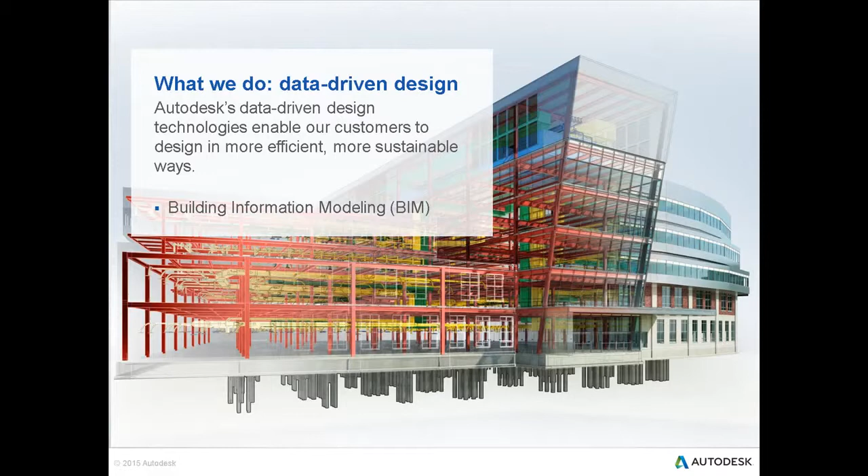When working in BIM, professionals are using visualization to make better informed decisions earlier in the design process, which all leads to one thing: better designs.

Now, there are some key trends in the industry. For example, urbanization. Over 50% of the world's population now live in cities, and this trend will only continue, with a report from McKinsey estimating that by the year 2030, 5 billion people will live in urban areas. In just a few decades, the world will need to support a population of 9 billion.

The emerging economies' development compounds this change. It's no secret that they are growing fivefold faster than most developed economies. They have the benefit of not having to replace existing ailing technology like developed economies either. In essence, this means their growth will continue, and in a not so distant future they'll be technologically level pegged with countries like America, Australia, Canada and the United Kingdom.

At the same time, the availability of natural resources, energy, water, materials and land is diminishing. This is where sustainability and economics intersect and are driving the transformation in our industry. Energy and water in particular are major components in the cost of operations for corporations and municipal governments. So investors, consumers and communities all have an interest in converting to more efficient ways of constructing and managing buildings.

Today's marketplace is intensely competitive. Companies are facing intense levels of competition, higher customer expectations for cost, schedule and quality, and increased scrutiny from investors and the general public.

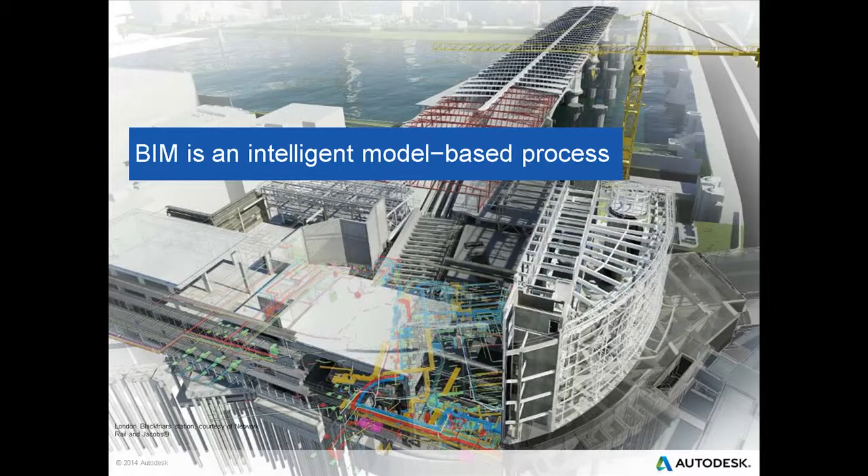Building information modeling is changing how buildings, infrastructure, and utilities are planned, designed, built, and managed.

Now, why choose Autodesk BIM solutions? Well, Autodesk delivers advanced technology for design, visualization, simulation, and coordination. And they also deliver business agility made possible with desktop, cloud, web, and mobile platforms, along with more cost-effective packaging to better meet changing project needs.

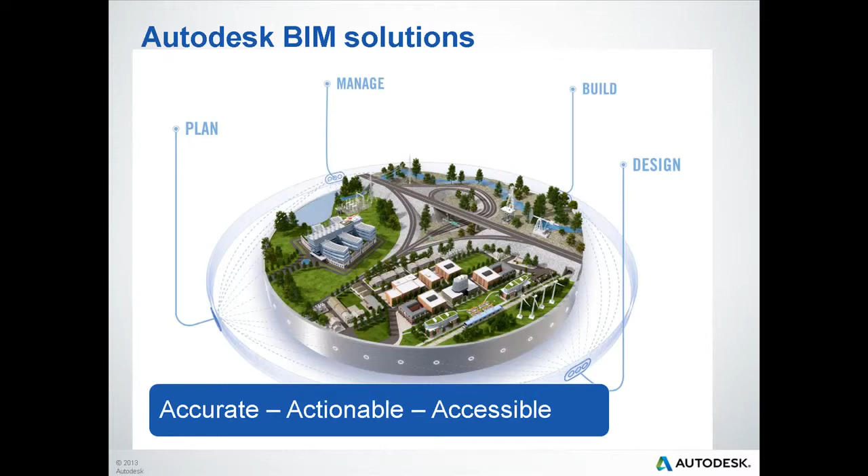Now, what are some of those technology trends?

To expand on the technology trends, a lot of change in the industry is driven by, or at least facilitated by, BIM. This change is disruptive, but it also brings a lot of opportunity to transform business and enter new areas of work. Here are some examples.

Architects and engineers are exploring a lot more design alternatives earlier on in a project by using BIM. Not only does this deliver more exciting and innovative buildings, but it also drives a deeper understanding of detail in the conceptual design phase, when the cost of exploring changes is minimal and the ability to make those changes is at a maximum. BIM is helping the industry move out of the dark ages and become more efficient.

One of the ways this is happening is by multiple personas connecting different phases of design together and blurring the lines between roles. An example is an engineer and architect collaborating together in conceptual design, or an engineer and contractor working together to bring fabrication level of detail much earlier into the project than before.

Simulation is everywhere and is being used by more people than ever before. Autodesk has invested in simulation in the last few years, and what they see is more people starting to adopt all kinds of simulation. For example, Autodesk Robot Structural Analysis or Autodesk Green Building Studio for energy. There's also advanced things like the computational fluid dynamics that Autodesk has delivered. Now, through an integrated BIM approach and linking their Revit models directly, this simulation works seamlessly with your Revit models in BIM.

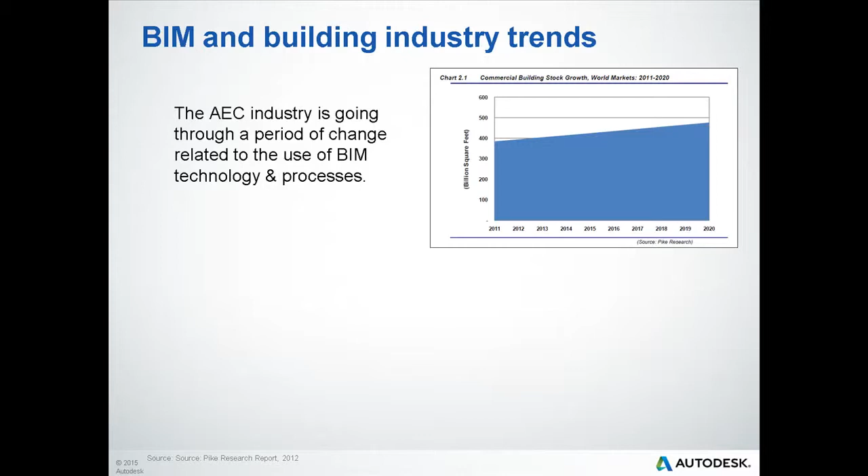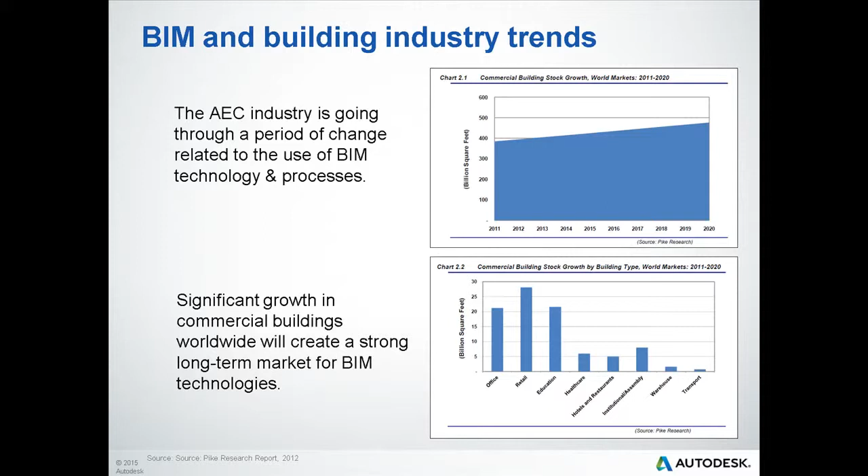Most BIM applications will be performed on new construction activities, although building retrofits provide a sizable market as well. One of the main reasons for performing a retrofit is to reduce energy consumption, and the latest BIM tools support this work through the availability of rapid energy modeling technologies.

Contractors, who now lead the industry in overall BIM adoption, also showed the most dramatic changes in implementation from 2009 onwards.

Now, how is BIM adoption going on worldwide? Well, BIM is not just happening in isolated areas, it's not about the software. What we are seeing here is a global trend towards a different process for managing the lifecycle of all assets in the built environment. BIM adoption varies by country, of course, but the consistent theme is growing awareness.

Levels of BIM adoption in North America surged from 28% in 2007 to 71% in 2012. In the UK, they saw a 39% adoption rate in 2013 as opposed to 13% in 2010.

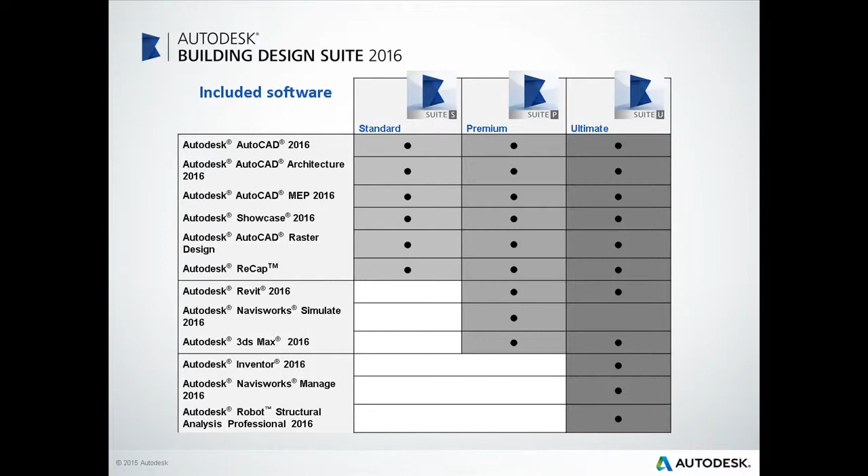The Ultimate Suite builds on the Premium Edition. This is for architects, engineering, and construction professionals who need the power of BIM plus additional advanced tools for design and construction. You'll find in this suite the addition of Autodesk Inventor and an advanced version of Navisworks, which includes clash detection. The suite also includes Robot Structural Analysis Professional, which provides structural engineers with advanced building simulation and analysis capabilities, ideal for large, complex structures.

The Building Design Suite is a comprehensive solution for all building segments, with customers in architecture, structural engineering, mechanical, electrical, plumbing engineering, and construction, as well as building operators.

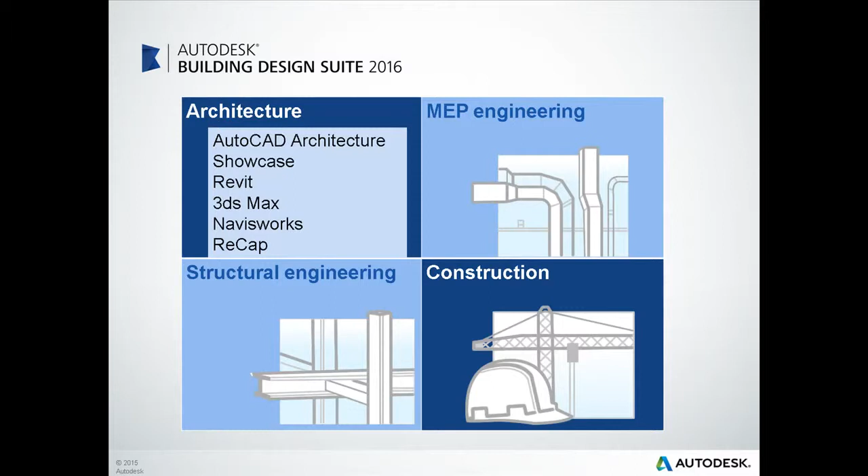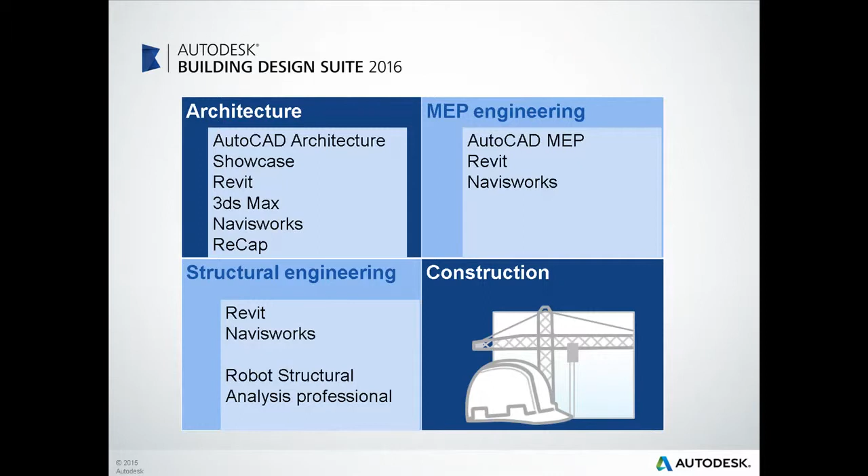Some typical use cases: architects make use of AutoCAD Architecture, Showcase, Revit, 3ds Max, and ReCap. MEP engineers use AutoCAD MEP, Revit, and Navisworks. Structural engineers may use AutoCAD, Revit, Navisworks, and Robot Structural Analysis Professional. Construction contractors may use AutoCAD, Revit, Navisworks Manage, and Inventor.

The goal of the suites is to make building information modeling based solutions broadly accessible across these segments by providing software for the entire building lifecycle, including design, visualization, simulation, documentation, building, and operations.

The Autodesk Building Design Suites help you design and communicate more effectively with greater interoperability and more powerful workflows than are feasible with standalone products.

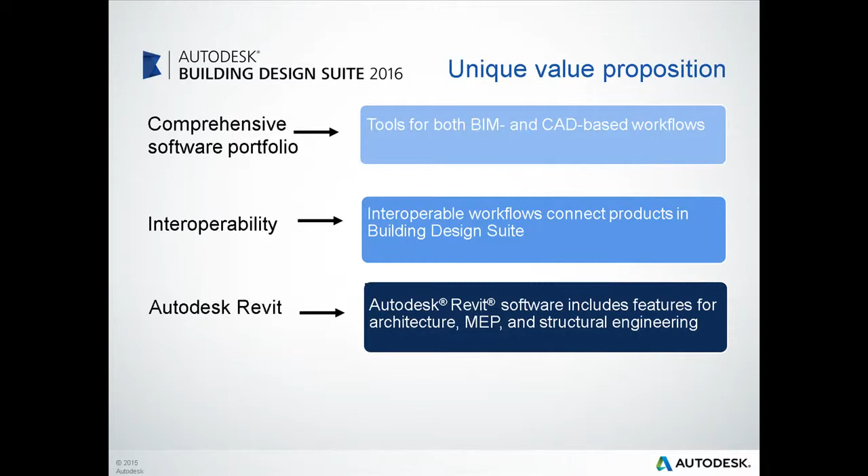Additionally, customers who purchase a license to the Building Design Suite Premium or Ultimate editions with maintenance subscription, or who purchase a desktop subscription to the Building Design Suite Premium or Ultimate, can extend the capabilities of their software with additional services, including faster, more accurate energy analysis on design concepts, cloud-based collaboration capabilities, and fast rendering of photorealistic images. Those images, when rendered online, can also create panoramic renderings.

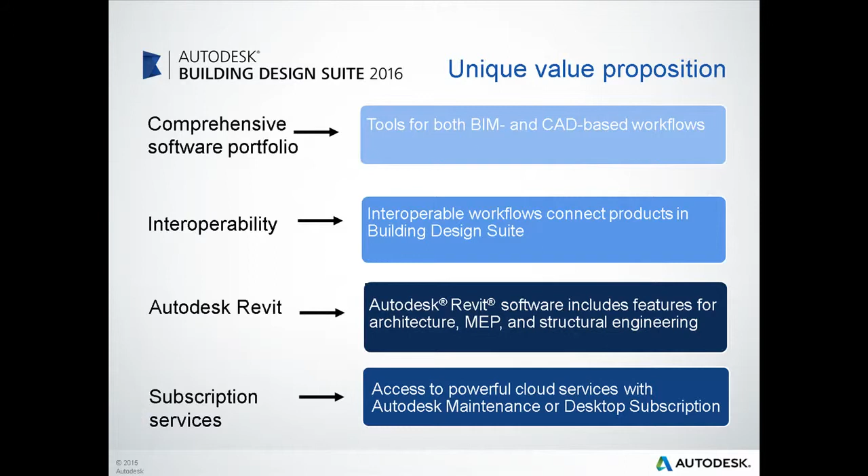Autodesk Building Design Suite 2016 Premium and Ultimate editions include Autodesk Revit 2016 software, which contains tools for architectural design, MEP engineering, and structural engineering in a single comprehensive application. Gain access to a broader set of tools to help streamline your workflows and collaborate more effectively with other building design disciplines on the Revit platform.

The Autodesk Building Design Suite can help customers design and build better buildings with intelligent 3D model-based design, present ideas more clearly with compelling visualizations, use integrated analysis to help inform design and construction decisions, create consistent documentation with greater accuracy and efficiency, and make more informed decisions with earlier and more valuable insight across the building lifecycle. So let's take a look at some of the tools for design.

The building design tools provide a comprehensive set of tools that can provide access and support for both BIM and CAD-based design workflows. You can use BIM tools, including the Building Design Suite Premium and Ultimate editions, for intelligent 3D model-based design, or gain the benefits of working in cutting-edge CAD tools in all three editions.

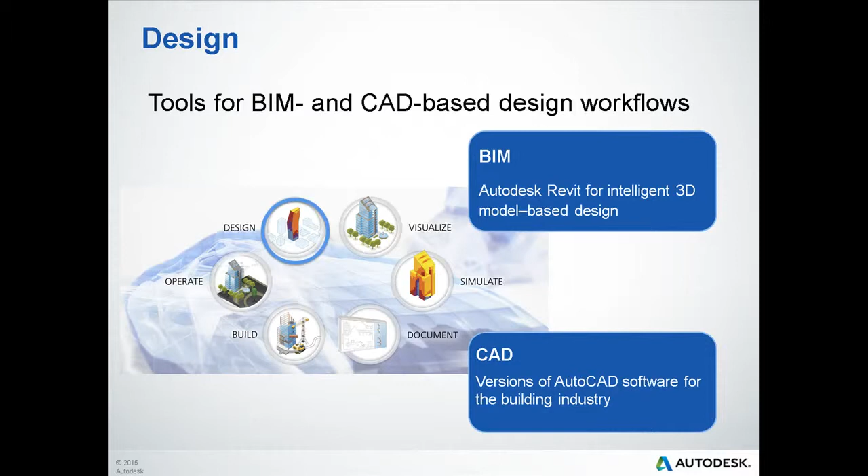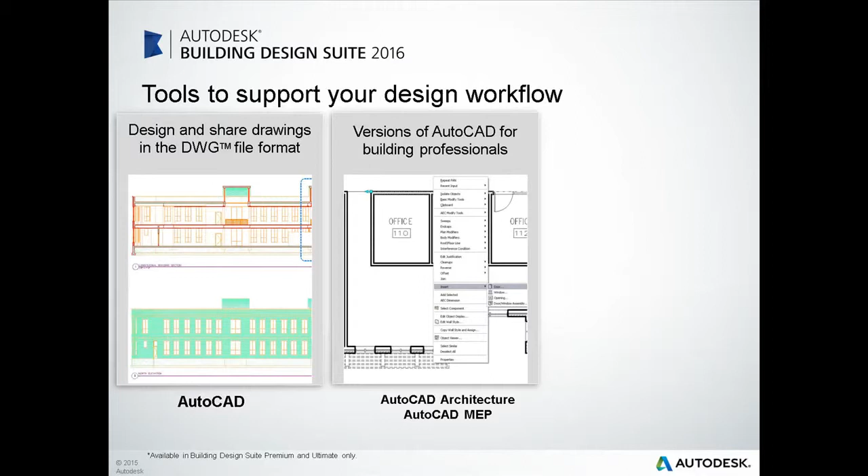There are several products in the Building Design Suite that can enhance the design process. The suite provides design tools for different design needs and includes products such as Autodesk AutoCAD. AutoCAD software can help you design and share drawings more accurately and efficiently in the DWG file format. AutoCAD Architecture and AutoCAD MEP are the building-specific versions of AutoCAD for architecture, mechanical, electrical, and plumbing engineering.

Autodesk Revit, available in the Building Design Suite Premium and Ultimate editions, includes Autodesk Revit software that combines tools for architectural, mechanical, electrical, and plumbing engineering, and structural design in a single comprehensive application that utilizes 3D model-based design.

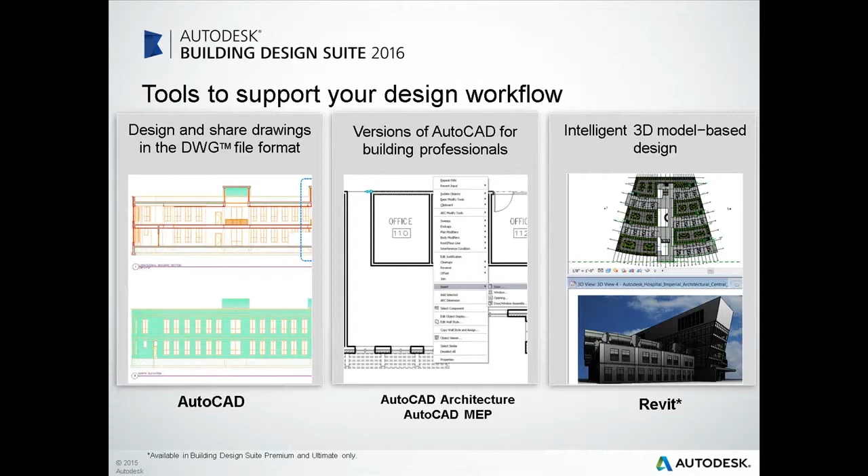All editions of the Building Design Suite include AutoCAD, one of the world's leading CAD applications. For designers, drafters, and detailers who need a foundational set of tools to efficiently design, document, and share drawings in the DWG file format, AutoCAD and the industry-specific versions help users work productively and collaborate with others.

New to the 2016 release is the BIM coordination model, which helps users avoid clashes in their designs by enabling use of Navisworks models as underlays in AutoCAD. Enhancements to PDF performance and usability help improve communication with stakeholders.

The 2016 release of Autodesk Revit continues to support user productivity with improved Revit software performance and usability enhancements.

The navigation during redraw feature helps speed navigation by interrupting the display of model elements as you move through the model. Automatically linked views in PDF exports improve communication by navigating PDFs exported from Revit more easily.

Share your designs as electronic PDF files with automatically linked views and sheets. Each view tag in the PDF file is a hyperlink.

Work in perspective views. You no longer always have to change views to make quick changes, with new tools and capabilities available in the perspective views.

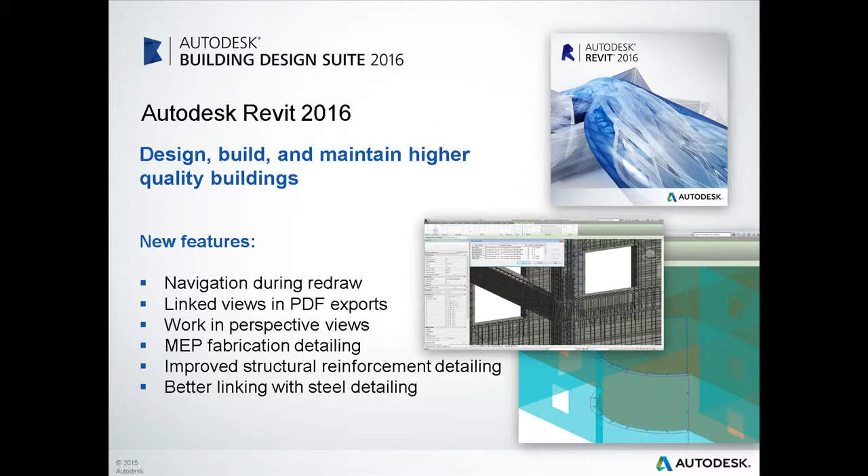Now, some of the new excitement in the industry is around reality capture, which is something Cansel can help you with, our field to finish. The Building Design Suite includes software that enables users to incorporate real-world data in designs. Autodesk ReCap software helps capture and integrate 3D reality data from laser scans and photos directly into your design process.

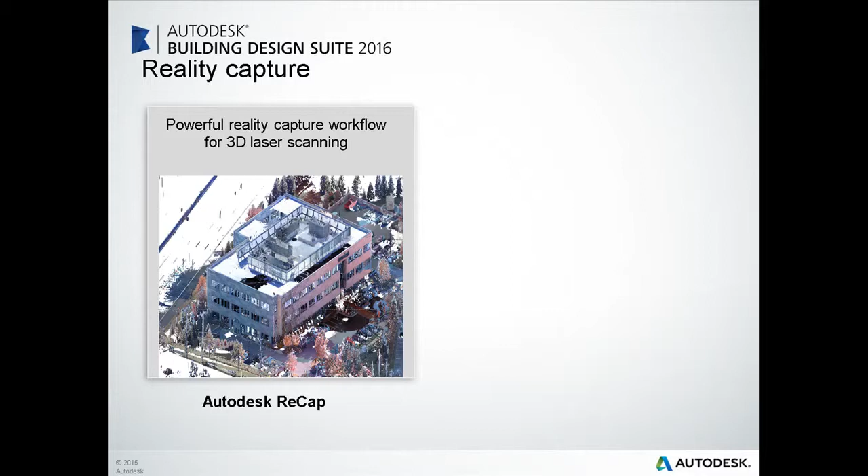For 2016, ReCap enhancements include support for new native laser scan formats, smart measurement tools to help measure diameters and distances with automatic shape fitting, and the ability to add tags, notes, pictures, and hyperlinks to ReCap files and have them automatically sync between a desktop and the cloud.

Autodesk AutoCAD Raster Design is a way to take raster to vector, and it helps you easily edit, enhance, and maintain scanned drawings and plans in a familiar Autodesk AutoCAD environment. Make the most of raster images, maps, aerial photos, satellite imagery, and digital elevation models by including them in designs.

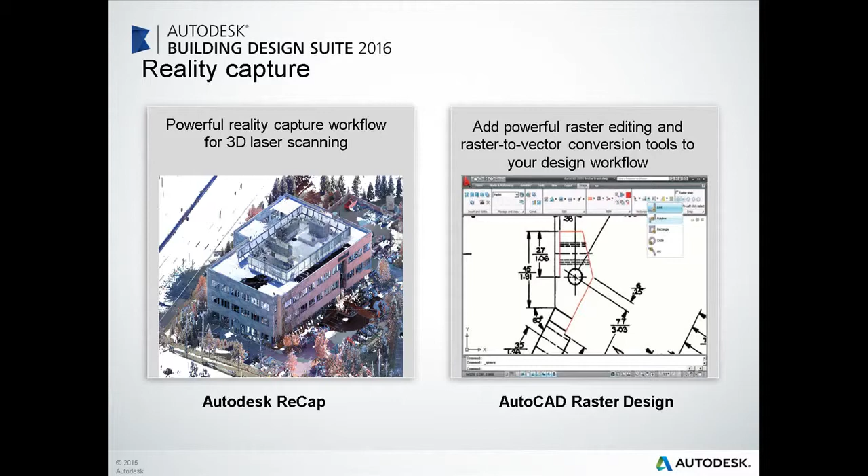Now let's talk about the software in the Building Design Suite that can help users produce compelling visualizations that can be used in communication of ideas.

This includes solutions that can provide tools which can help you to communicate your ideas more effectively to help gain approvals, explore ideas more accurately within the building site context to help visualize design concepts, allow teams further downstream greater visibility earlier in the process, helping to reduce gaps in communication, reworks, and ultimately time and cost by supporting the identification of conflicts before construction begins.

We can also create high impact marketing visuals to help win that new business.

So for the visualization phase of the building workflow, the suites provide tools that can offer benefits for differing visualization needs. You can do your renderings inside of multiple products like Revit, Showcase, 3ds Max, even Navisworks.

In Revit, for in-process visualization, this enables you to capture designs in a near photorealistic state right within your design software.

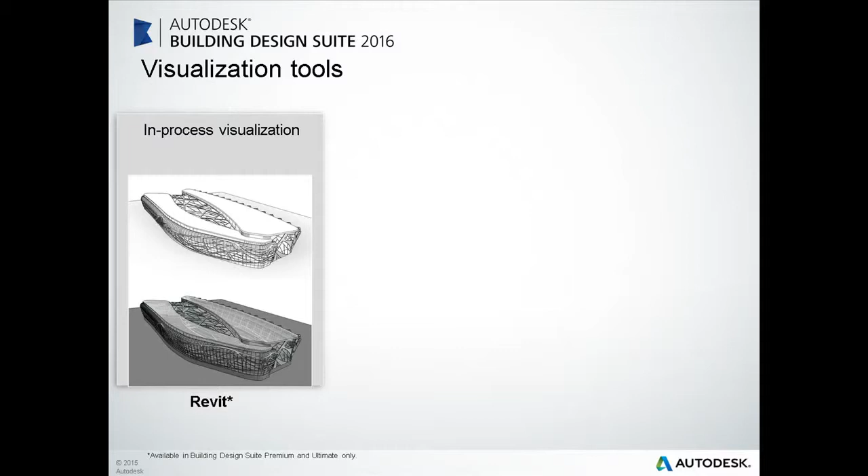You can use Autodesk Showcase to easily transform AutoCAD designs and Revit models into compelling imagery, movies, and presentations for interactive presentations. Help secure customer buy-in by more effectively communicating your designs with an immersive interactive environment and storytelling features.

Then Autodesk 3ds Max is for those cinematic animations and near photorealism. Autodesk 3ds Max software provides architects, engineers, and visualization specialists with sophisticated 3D visualization tools that extend the BIM workflow with push-button, cinematic quality renderings, and 3D animation.

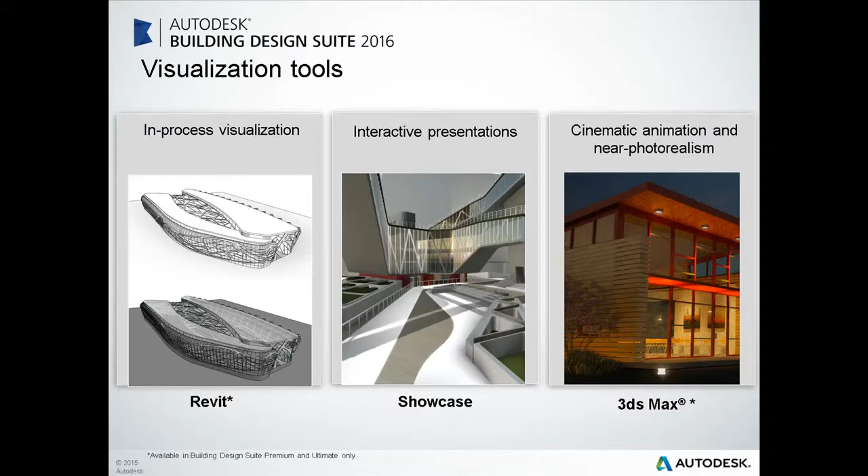The Building Design Suite workflow includes the ability to launch your Revit model into Autodesk Showcase or Autodesk 3ds Max directly from within Revit. So what are some of the new features in 3ds Max 2016?

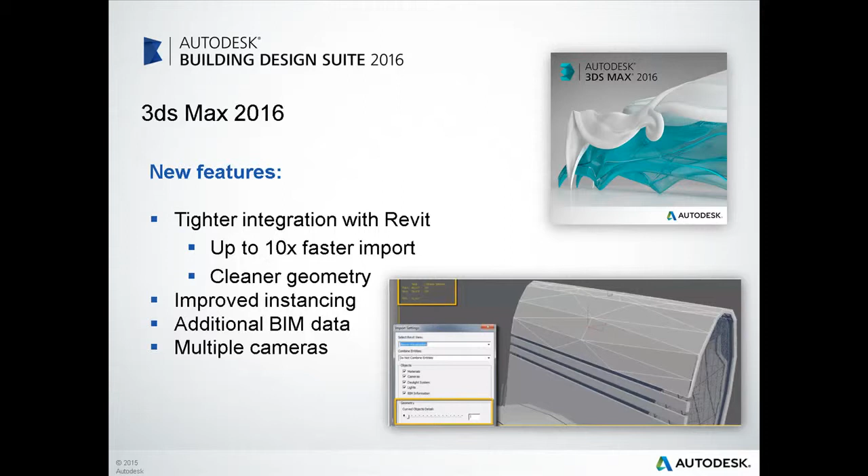Well, 3ds Max is a powerful tool to help architects, engineers, and contractors create more convincing visualizations. With a tighter integration between Revit and 3ds Max in the 2016 release, users can directly import and file link Revit models up to 10 times more quickly and with cleaner geometry. Additional enhancement features include improved instancing, additional BIM data, and multiple cameras.

The Design Suite Premium and Ultimate editions include integrated analysis software that can help better inform design and construction decisions. Use integrated analysis to gain insight into performance before breaking ground. Analyze and simulate even the most complex structures and mechanical, electrical, and plumbing systems. Use those 3D models to explore design alternatives and help identify potentially costly design conflicts. You can also analyze energy consumption and costs to help design more energy efficient buildings.

So what are the tools available for simulation? Autodesk Revit contains many analysis tools that can help inform improved efficiency and performance of your building data. With support from features such as the ability to assign physical materials for building performance analysis, users can improve the efficiency of BIM-based model performance workflows by assigning thermal and structural properties to the building envelope.

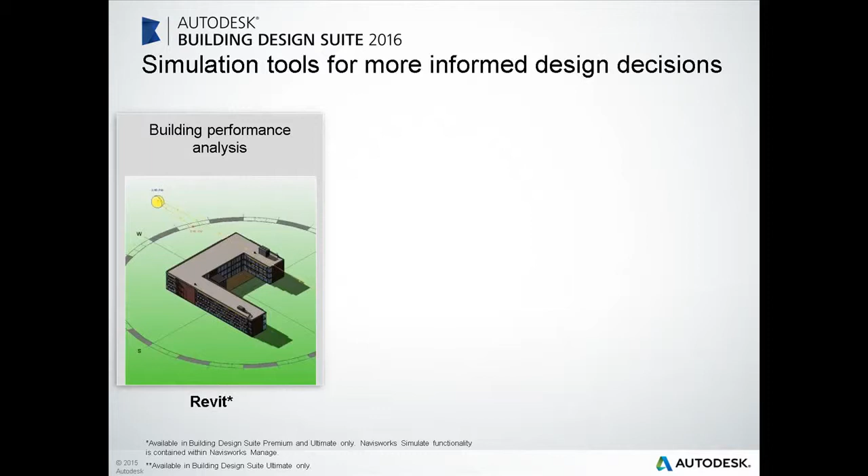With Autodesk Maintenance and Desktop Subscription, Revit can also access integrated Autodesk cloud services, including rendering, daylighting, and conceptual energy analysis.

Autodesk Navisworks Simulate project review software supports intelligent 3D model-based designs with advanced scheduling and visualization capabilities, and enables construction professionals to simulate material and equipment sequencing as well as costs of materials and labor over time. Autodesk Robot Structural Analysis Professional software enables structural engineers to more efficiently perform advanced analysis on large and complex building structures.

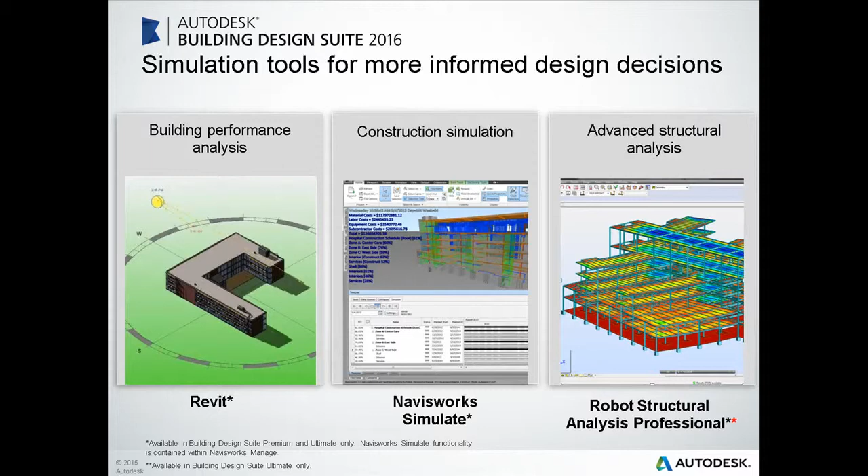So let's take a look at the documentation tools. You can create more consistent, higher quality construction documentation, with greater accuracy and efficiency. Use design models to help speed the creation of fabrication drawings.

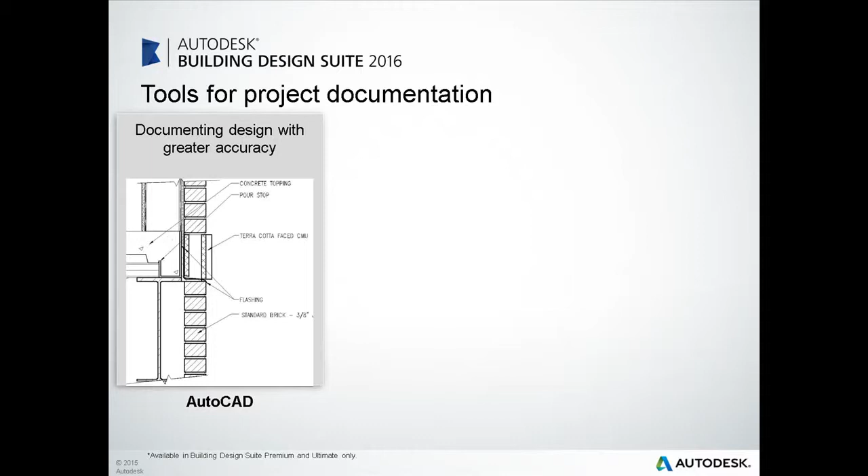So, tools available for project documentation: Autodesk AutoCAD is a valuable tool that can help you document designs with greater accuracy and share your drawings efficiently in the DWG file format.

AutoCAD Architecture and AutoCAD MEP take advantage of versions of AutoCAD software specifically for the building industry, which can help increase drafting productivity by providing access to building-specific tools and content in the familiar AutoCAD environment.

Autodesk Revit helps keep your documentation coordinated and consistent by taking advantage of building information modeling and parametric building objects, which means that a change made anywhere in your Revit model can automatically be reflected in your project documentation. If you change something in a plan view, your section is going to update automatically, and vice versa.

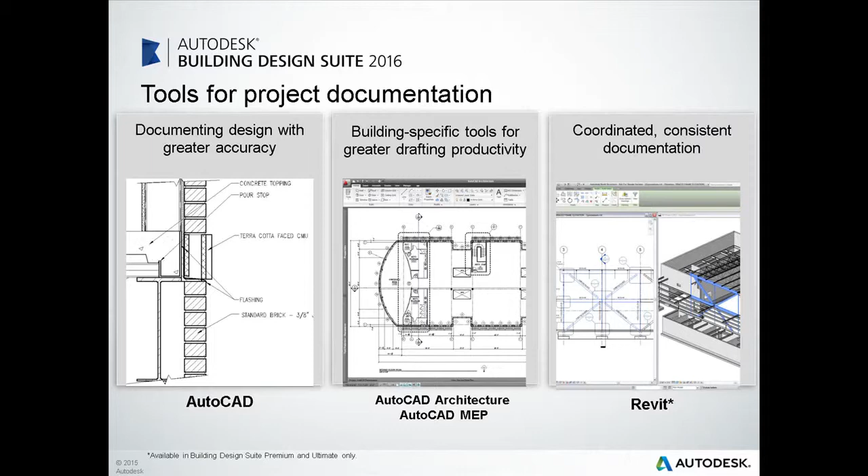Now, what about getting those valuable insights before the building actually starts? In the building phase of the Building Design Suite Premium and Ultimate editions, you have improved control over project outcomes with greater insight across the building lifecycle. The software can help increase visibility into building constructability, cost, and schedules. You can virtually explore projects before breaking ground and help identify costly design conflicts before construction begins.

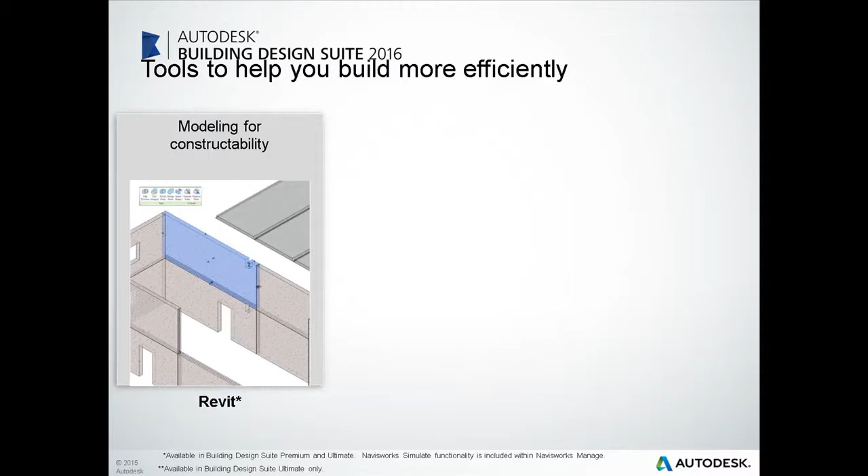Now, the tools that are available to help you do this more efficiently: in Revit, users can view, create, or edit design models to better understand design intent and explore project constructability with Autodesk Revit software.

Autodesk Navisworks Simulate integrates multiple models to improve team collaboration, simulate construction, quantify project scope, and enhance project review. While Navisworks Manage software, in the Ultimate version of the suite, integrates data from multiple sources to facilitate whole project review and includes advanced tools for clash detection and interference checking and management.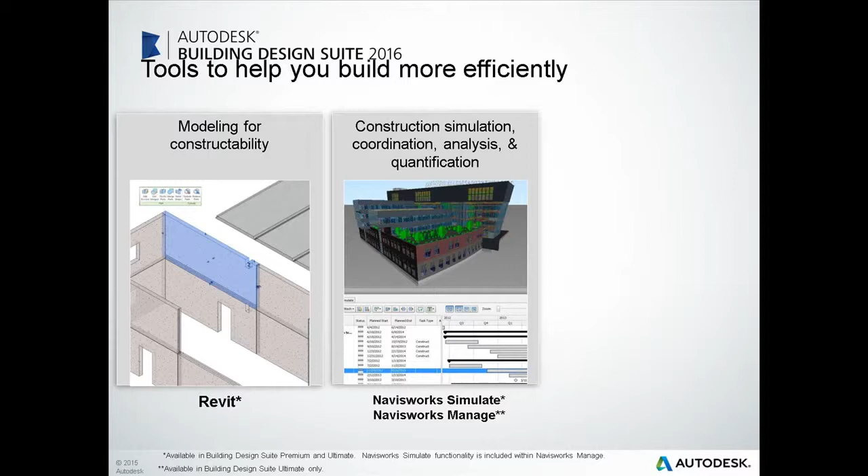Autodesk Inventor software has tools for 3D mechanical design, documentation, and product simulation. You can collaborate with building component and equipment manufacturers to better understand and capture design intent and execution in the field.

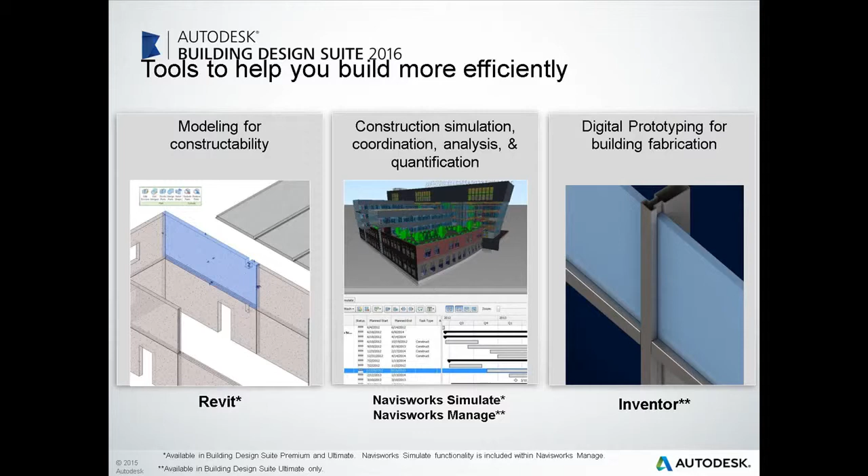Now, there are some great enhancements in the release of Navisworks software included in the Building Design Suite 2016 Premium and Ultimate: BIM coordination with AutoCAD 2016. You can attach Navisworks files to your AutoCAD drawings, enabling you to reuse data from a greater variety of sources.

2D takeoffs are an important function in your workflow. You can manage the appearance of takeoffs by changing the color, opacity, and line thickness of takeoffs in the item catalog. Once you have finished drawing takeoffs, you can now print the 2D sheets containing your markups using the print option in Navisworks. The Navisworks 2016 update helps you clearly communicate your 2D takeoff efforts.

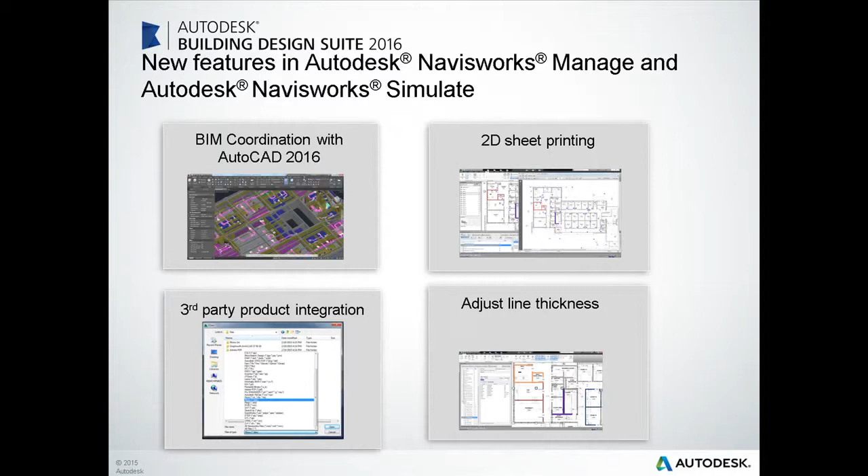To provide an integrated workflow, Navisworks now supports integration of Graphisoft's ArchiCAD 17 and 18, Rhino 3D up to version 5, and Adobe PDF Reader for 2D. You can also manage the appearance of 2D takeoffs by varying the line thickness of the takeoffs in the item catalog.

Now let's take a look at Autodesk Subscription. This offers the most convenient, modern, and flexible way to license and access the latest software and services that you need to help grow your business.

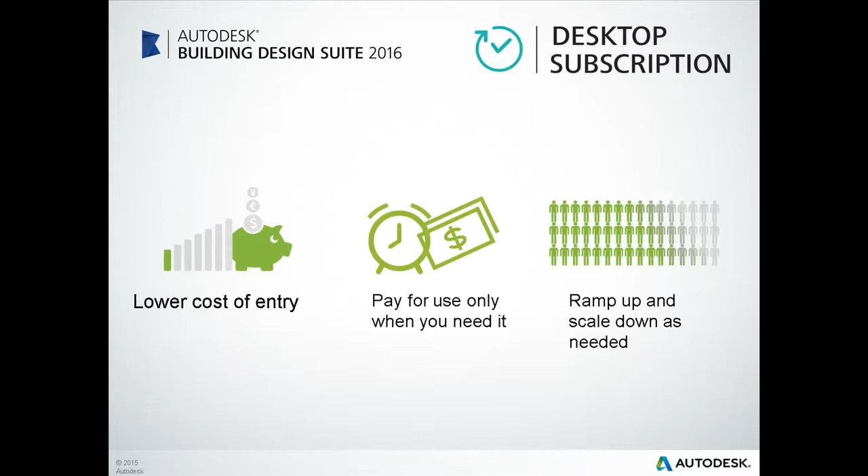Included in subscription are cloud services. Paying for software licenses doesn't have to be a barrier to building information modeling. With desktop subscription term licensing options from Autodesk, there's a lower cost of entry. Pay for Autodesk Building Design Suite software only when you need it, whether for a growing project or to ramp up for new business. Scale the number of licenses you need up or down to fit your needs. With desktop subscription, you're always using the latest version of the Building Design Suite software and have access to cloud services and support.

With the purchase of a desktop subscription or a perpetual license of Building Design Suite with Autodesk Maintenance Subscription, customers can extend the capabilities of the Building Design Suite. Use cloud services to perform faster, more accurate energy analysis on design concepts. Get cloud-based collaboration capabilities, almost anytime, anywhere software access, and faster rendering of photorealistic images.

The cloud services that are included with your Autodesk Building Design Suite on active subscription include rendering, Autodesk Green Building Studio, energy analysis for Autodesk Revit, structural analysis for Autodesk Revit, lighting analysis for Autodesk Revit, and InfraWorks 360 LT.

In the next portion of the presentation, we're going to take a look at the collaboration for Revit tools available within the Autodesk A360 environment.

So why consider BIM collaboration? The reality is that building projects are never simple. Here's a high-level snapshot of all the challenges that must be overcome to ensure that a project is successfully completed. There are numerous stakeholders across multiple time zones, different teams delivering on different schedules, and disconnected communication silos like email and PDF happening in places where designers aren't working. Multiple teams are working on multiple models, with each model progressing independently of the other within each firm's network.

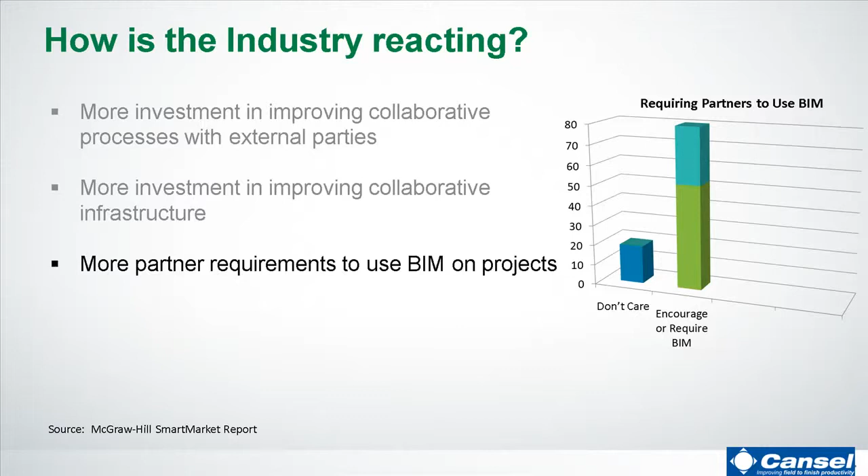As a result of these changes, the building industry is reporting some great ROI. Here's some of the value that customers are seeing with investing in better collaboration tools and processes. McKinsey recently conducted a study that sought to understand how project collaboration technologies impact how organizations collaborate with customers, partners, and employees. Its findings were quite interesting.

77% are seeing faster access to knowledge. 60% are reducing communication costs. 52% are seeing faster access to internal experts. 44% are cutting travel costs. And 41% are seeing increased employee satisfaction.

So what is Autodesk's solution for better BIM collaboration on building projects? Autodesk A360 Collaboration for Revit is a cloud subscription service that works with Revit software to connect building project teams with centralized access to BIM project data in the cloud.

With Autodesk A360 Collaboration for Revit, project teams collaborating on AEC projects can simultaneously co-author models across companies or locations. It enables direct access to project data across a firewall without a major IT investment. It includes tools that enhance communication and better connect the entire project team, including those who need access to project models without installing Revit software or exporting to PDF. Let's talk about each one of these key values in more detail, starting with easy access to project data.

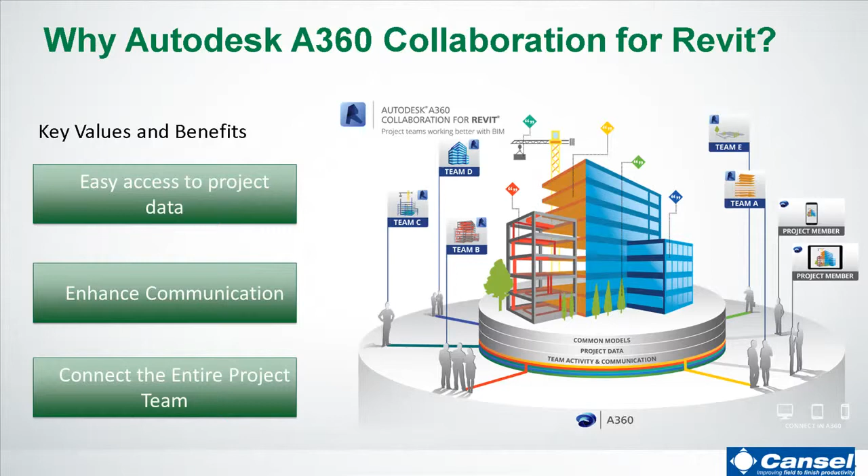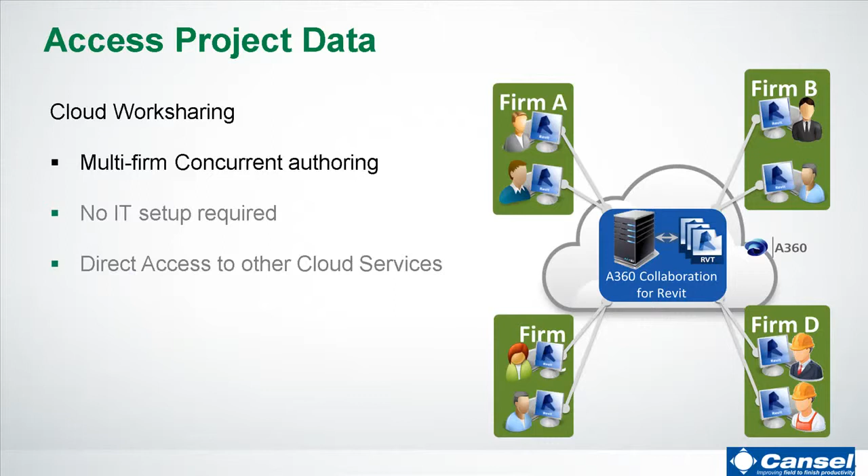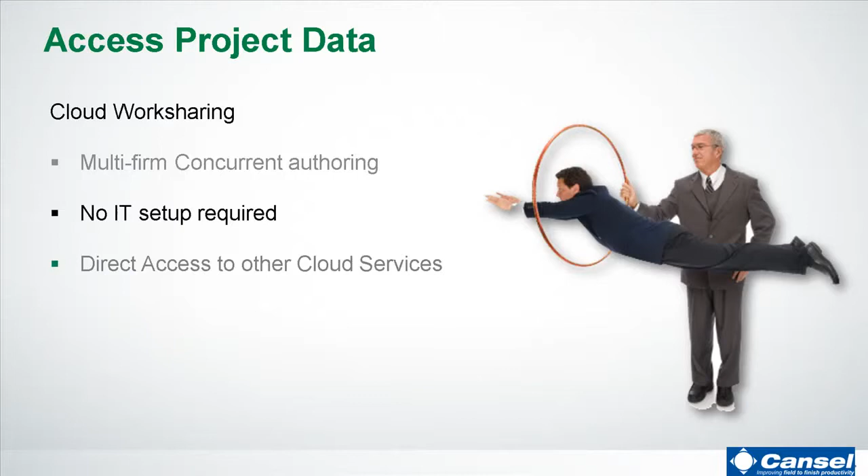Cloud work sharing is a central component to Autodesk A360 collaboration. It enables project team members in all disciplines from multiple firms or sites to concurrently author a model using a BIM process. Since it is in the cloud, there's no overhead associated with IT setup. It's just not required. Think of all the time and money that can be saved there.

Lastly, you can improve your Revit models with other subscription services, such as energy analysis for Revit, Green Building Studio, rendering in Autodesk A360, and structural analysis for Revit.

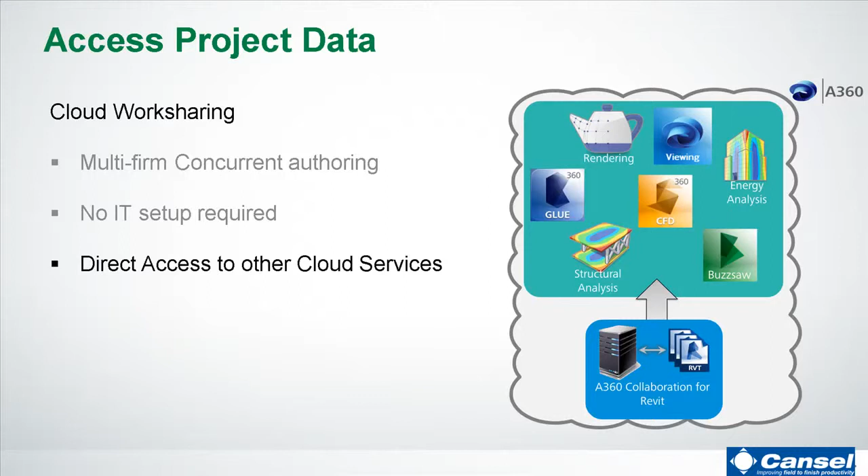In terms of the second key value, Autodesk 360 Collaboration for Revit enhances team collaboration with its project communication tools. Connect team members with direct, real-time chat within project models to free teams from traditional limited tools such as email and phone.

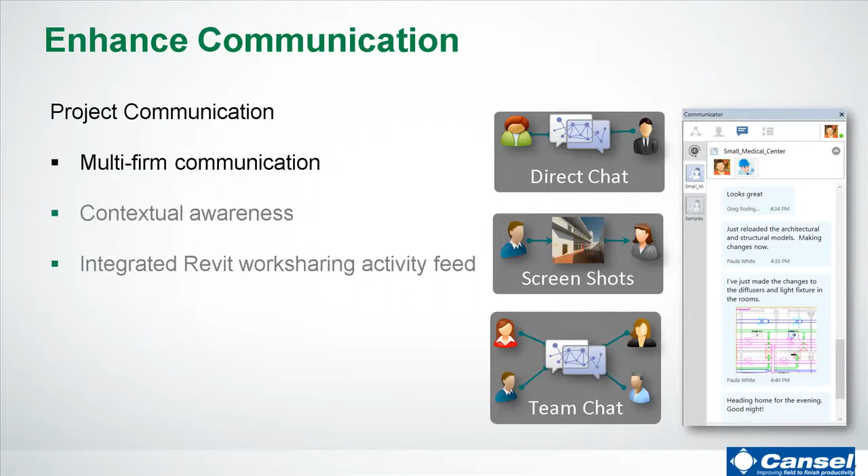You can easily chat with project members from other companies through the Communicator tool. You can chat one-on-one, send screenshots of areas that need more clarification, and do team chats. See what's happening in the model that you're working in, and easily see who's been making updates as you work.

Via the activity feed, you can even see what your other team members are doing with the models associated in your project, including the ones that you're not currently working in. For example, you can see when a model is being updated, letting you know that another version is available.

Finally, Autodesk 360 Collaboration for Revit connects the entire project team via the Autodesk 360 platform. Autodesk 360 provides Revit design and engineering teams with a centralized, cloud-based workspace and improves efficiency on projects. Make more effective decisions and deliver superior results.

Data from projects hosted in Collaboration for Revit surfaces in A360, making models easily viewable and searchable with no exports, translations, or uploads required. This experience only requires an HTML5 enabled web browser, iOS or Android mobile device, connecting the whole team anywhere, anytime, on nearly any device.

External team members and project contributors who do not have or do not use access to Revit software can share, access, and search design data, discuss challenges and successes, and stay current with project activities. Since A360 works with nearly all project data formats, collaboration can be centralized in one platform.

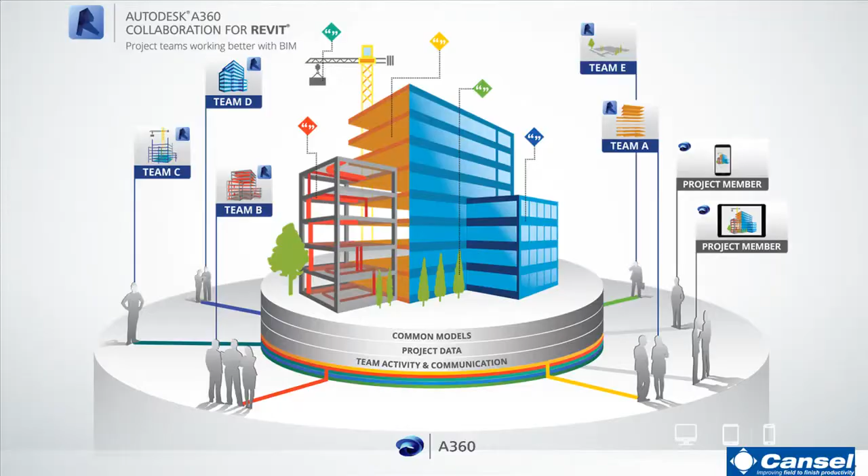In the following demonstration, a small medical facility comprising of architectural, structural, and MEP models constructed by 3 different firms will be used.

The architectural team is comprised of Greg Rodriguez and Paul Sanderson. The structural firm will be represented by Mindy Patel, and the MEP engineering will be represented by Paula White. At the end of the design segment, Hans Kloos will show some of the Autodesk 360 Collaboration for Revit review capabilities that he enjoys. Note that each user has a color code assigned to them.

All 3 companies are located in different parts of the country, so we will be able to demonstrate how Autodesk A360 Collaboration for Revit enables them to all collaborate and communicate project updates in real time. Let's start with a simple change to the architectural model and see what happens.

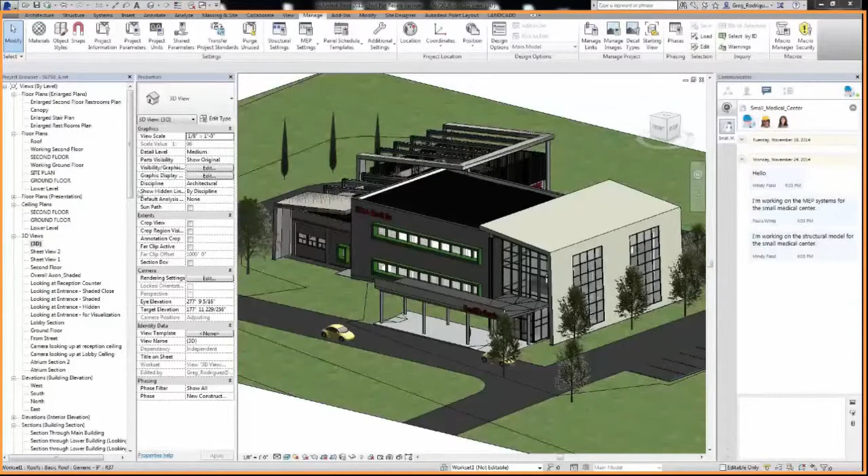Hello everyone, I'm Greg. Everything that I'll be doing in this demonstration will be highlighted by an orange border around my workspace. In this scenario, I've just received an email from the principal designer that the square footage in rooms 1201 and 1301 need to be increased.

Before I make the change, I can alert the whole team via the communicator tool. This tool is great because it offers team chat capabilities within the Revit environment.

As I begin to make the requested modifications, I notice that my colleague Paul is in the same architectural model and currently owns the walls that I wish to move.

Paul and I are in the same office, but rather than send him an email or walk down to his cubicle to request access, I'll just send him a request and a quick note via the communicator tool. Paul, did you get my request?

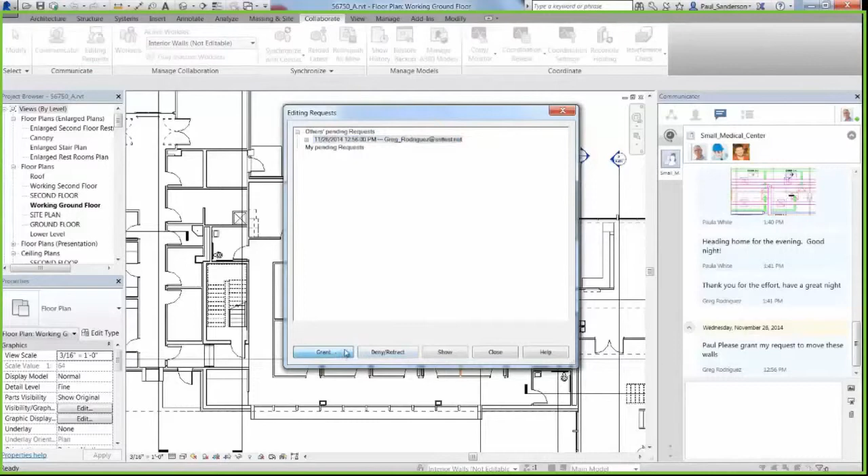Indeed, I did, Greg. For everyone in the audience, all of my actions will be highlighted by the green border in my workspace. Greg, I see your request and I'll grant you access to those walls. I'll also reply via communicator tool to confirm that you have access as well.

Perfect. Thanks, Paul. I see that the request has been granted and will finalize the request to modify the rooms by moving these specific walls over 2 feet.

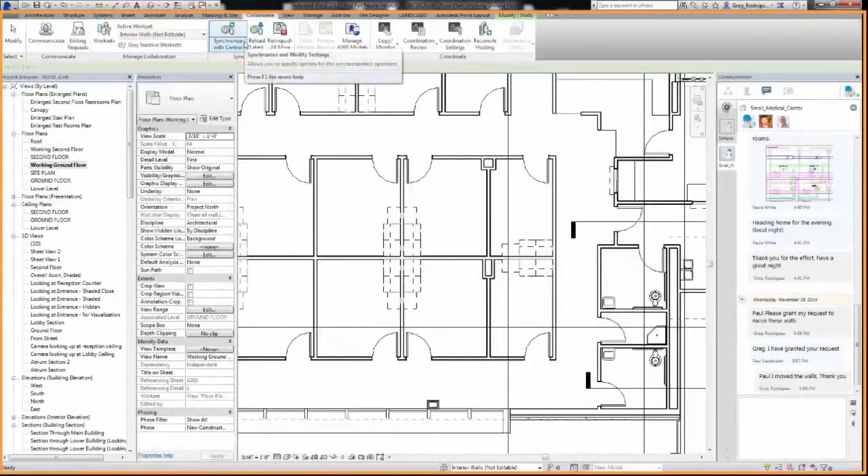With these changes, I'll update the architectural model so that my other teammates can see that it's been updated. I'll also capture a screenshot and send it via the communicator tool so that everyone on the project can see the specific change.

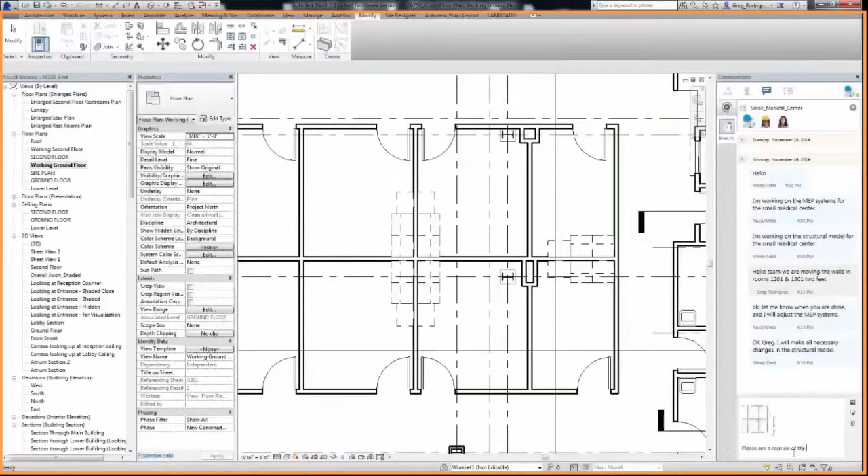Mindy, as the structural engineer who's leveraging the architectural model for your design, I'm sure this modification will have an impact on you as well.

Indeed it does, Greg. Hello everyone, I'm Mindy, the structural engineer. My firm is on the other side of town, but A360 collaboration for Revit gives me complete project access no matter where I am. Before I begin, I want to point out that all my actions are illustrated by the light blue border around my workspace.

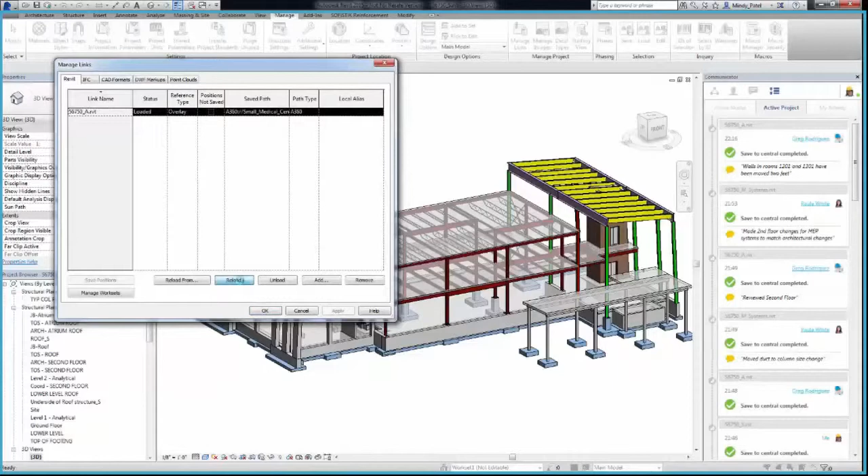Greg, I see your note, and I also notice that the architectural model is being synchronized. I'm going to reload the latest architectural model by going to my Manage Links option. While I'm waiting for the link to update, I can see the screen capture of your changes.

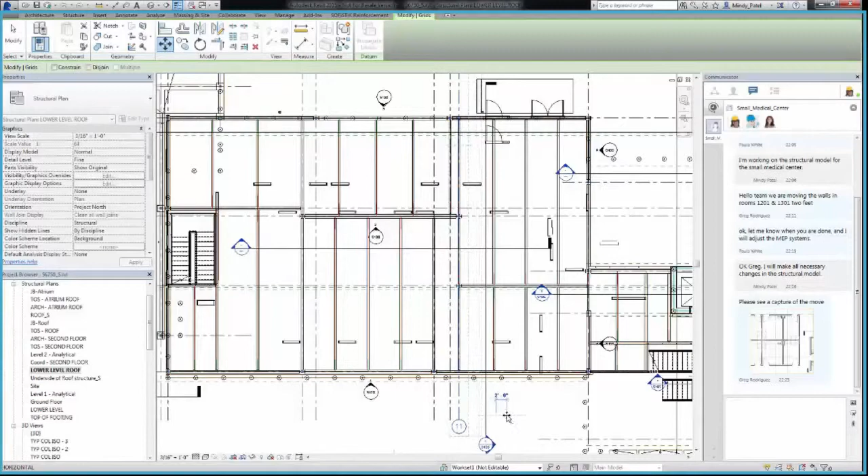Luckily, this change won't require a complete rework on my structural design. I can update my structural model to accommodate this change rather easily by simply moving a few columns and beams. To modify the location of the columns, I'll simply move column grid 11 over 2 feet. I'll also need to adjust the beams connected to these columns. I'll have to do this twice to account for both level views of the roof.

With the changes in place, I'll do a quick review of the update in 3D to make sure everything is accurate. Everything looks good. I'll just notify the team of my update via the communicator tool before I synchronize my model updates, complete with a brief description of my specific model changes.

I should also point out that all of the activity associated with this project, including model syncs and comments, is being captured in the Project tab, which acts like an archive and keeps everyone updated. Now I'm going to turn it over to Paula, our MEP engineer. I'm sure you'll like to weigh in on these project changes.

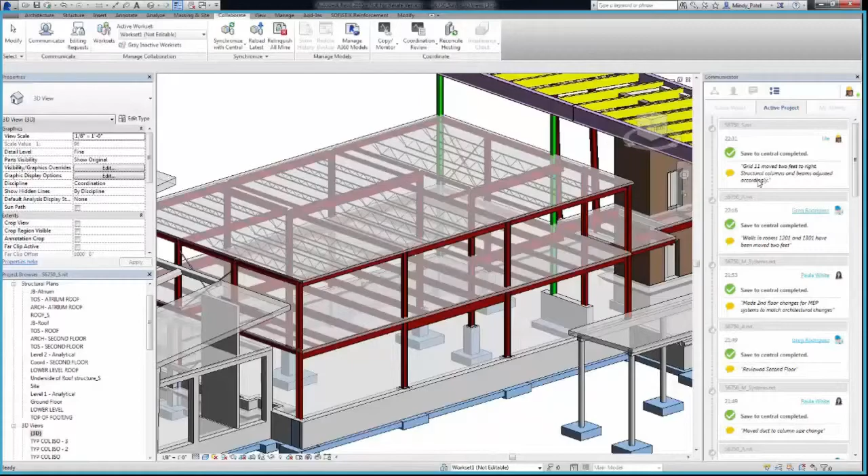Hello everyone, I'm Paula White. My firm is contributing the MEP design to this project. Like the other project members, all of my on-screen actions are color-coded. My border color is purple.

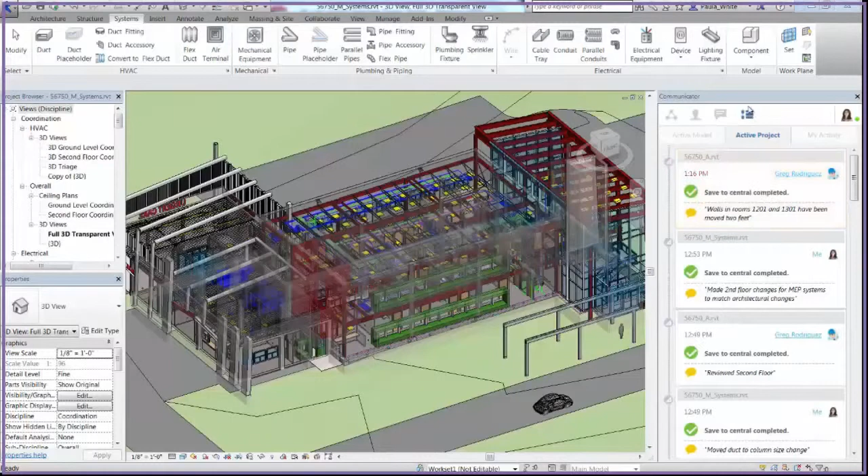I see both Greg's and Mindy's communication of their model changes via the communicator tool. I'll just respond that I'll check to see how their changes may impact my MEP design. I'll just wait a moment for both models to synchronize by going to the Active Project tab. As soon as the updates are done, I'll reload the latest updates.

Once the update is complete, Revit notifies me that a coordination review is necessary. So I'll go to the ceiling plan view to adjust the diffusers and light fixtures to match the room change. I can move the diffusers to optimize the airflow through the room and move the lighting for better illumination.

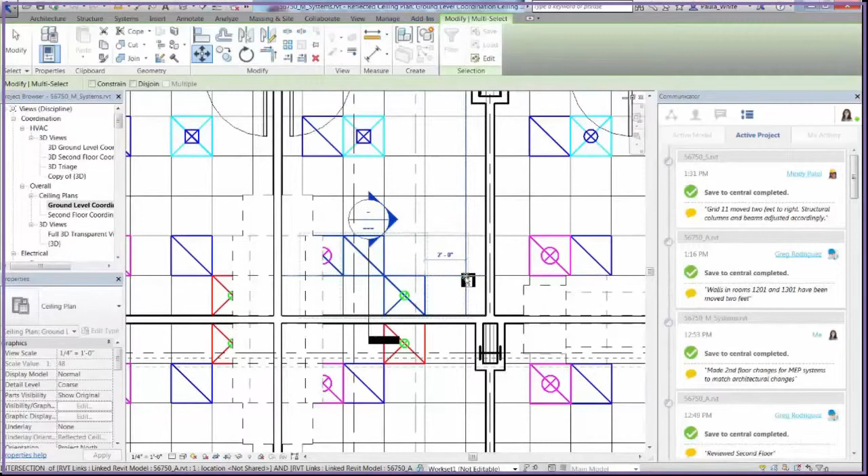Once this is done, I can go to the HVAC plan to determine if relocating the diffusers and light fixtures have caused any clashes with the building systems. After completing the review for interferences, I see that no clashes have been created as a result of my update.

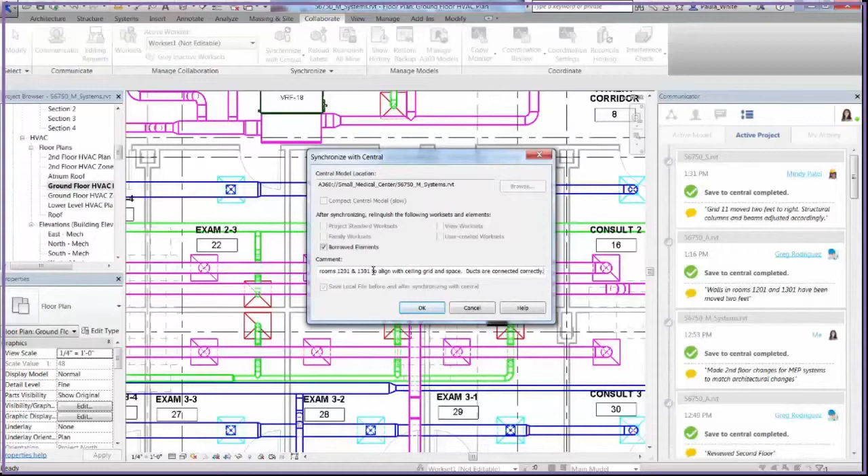Now, I can save my changes and sync to Central. As I do so, I'll add a comment to help all project team members know what changes I made to the MEP model. Now that I have notified the team using the communicator tool, I can head home for the weekend.

Thanks, Paula. Hello everyone, I'm Hans Klose, the principal of the architectural firm. When I initially asked Greg and Paul to adjust the size of the rooms in the architectural model, I knew that the changes would need to be communicated to the other teams that were leveraging the model for their work.

As you just saw, Autodesk 360 Collaboration for Revit is a great tool for project collaboration. It ensured that everyone had access to the latest models, whether they were within my firm or members of the extended design team in other firms. That ability is great, but as the principal of my firm, I especially like its ability to allow me to...

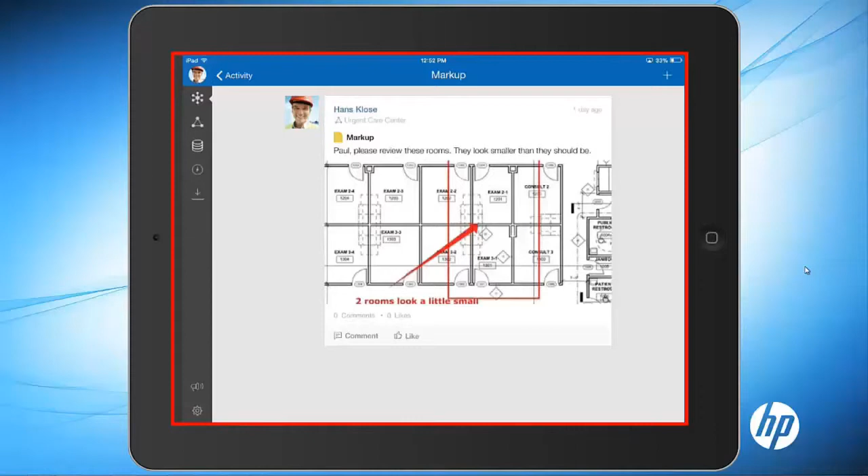Track updates via my mobile device. As you can see, here is my initial request to adjust the size of the rooms. Now that I know that all of the updates have been modeled, I can look at the model on my mobile device in 3D. I have full access.

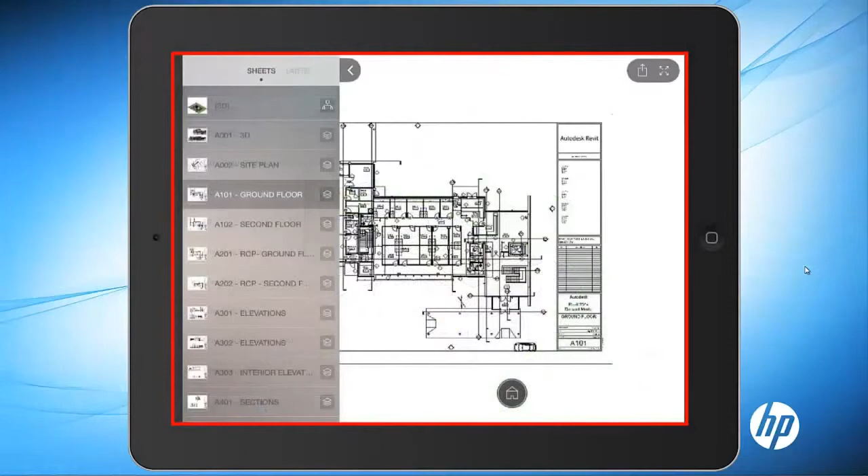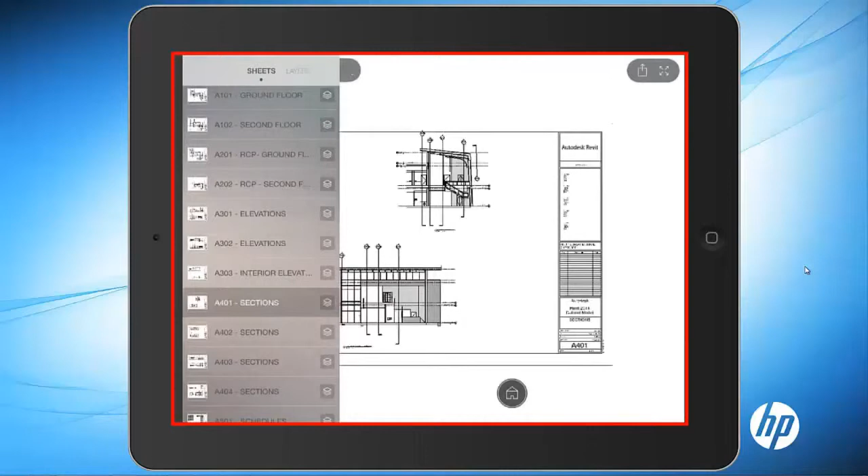I can rotate, pan, and zoom. I can also look at all of the sheets associated with this project. This mobile access is perfect for me because I'm rarely in the office. With Autodesk 360 Collaboration for Revit, project access and updates are available to me whenever and wherever I need it.